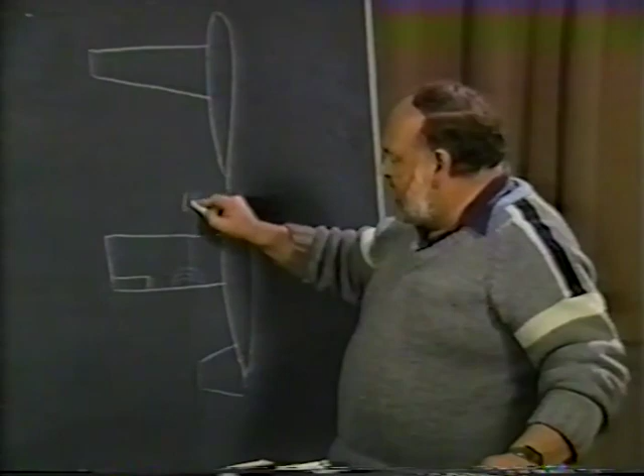This very definitely has a good effect in forcing the inboard section to stall before the outboard section. There are two disadvantages to that approach. One: if this inboard section stalls at, say, 16 degrees, just picking that as a number, and you've put 3 degrees of twist on it, then the outboard section, if everything else were the same, is only at 13 degrees. Well, if we take a look at the CL versus alpha plot again—this is the lift coefficient, this is the angle of attack...

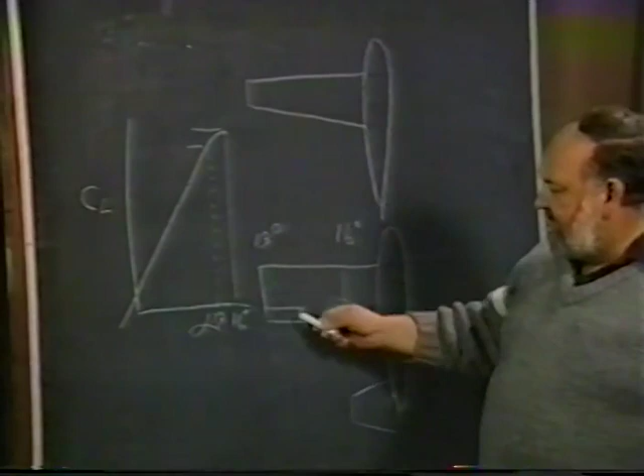If this was 16 degrees, that would cause it to stall, and if this is 13 degrees right here, you can see there is a reasonable portion of maximum CL that this outboard section isn't going to be able to generate. So for that amount of area and that airfoil section, you're not getting all the lift that you possibly can. It may not be too far away from maximum, but it still is a factor, and it depends on how much twist you put on.

The second disadvantage, of course, is that once you're cruising along at high speeds, particularly for a high-speed airplane, the outboard section now may not be lifting. In fact, it could even be lifting downward. About 10, 15 years ago, there was a sailplane, a high-performance sailplane, where the designers built a little bit of washout into the wing.

Here you are with a long aspect ratio wing, and they put this washout in it—why, I'm not sure. I guess they really wanted a nice stall characteristic for a sailplane, but that's not really important, because you don't bring a sailplane in landing at maximum CL. But in any event, after a competition one time, he came racing across the finish line, trying to get there as fast as he can.

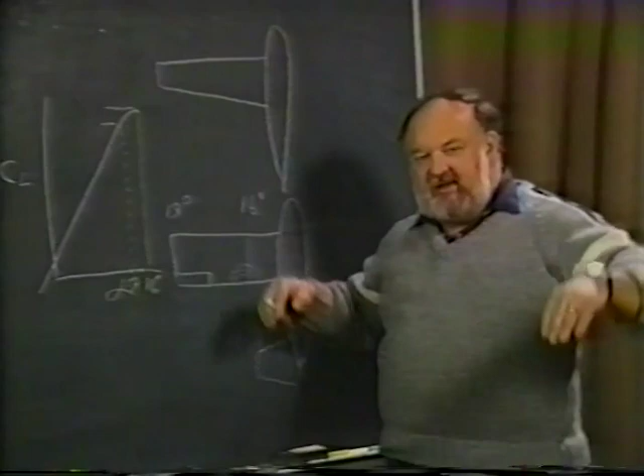As he dove through the finish line and pulled up, the outboard sections of the wings literally structurally failed downward, because the outboard section of the wing was flying at such a negative angle of attack at that high speed that it overloaded the wing spar in a downward direction.

The fellow pulled up and bailed out of it. The airplane was lost completely, but he survived without any problem. That just shows you what happens if you take a design characteristic and use it in the wrong particular place. So I'm not really very much in favor of the idea of putting washout into the wing itself like that. It can be used, but there are other things that can be done.

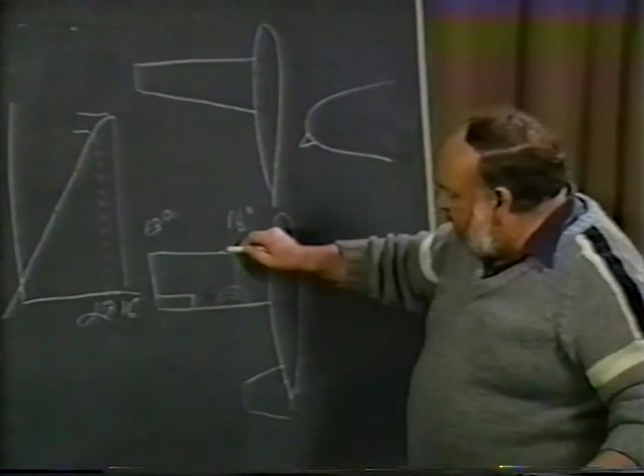For example, if you do something to the leading edge, you can immediately affect the stall. A simple way is to put a little stall strip, and I'll show you what that means. Let's take the leading edge of an airfoil. You can actually install a wedge-shaped device that might run 12 inches or 8 inches along the leading edge of the wing. All this is really doing is forcing the leading edge to stall, or at least build up turbulence to the point where it forces that section of the wing to stall.

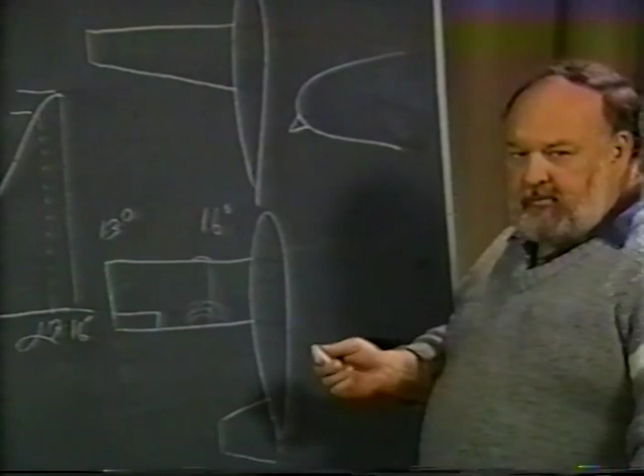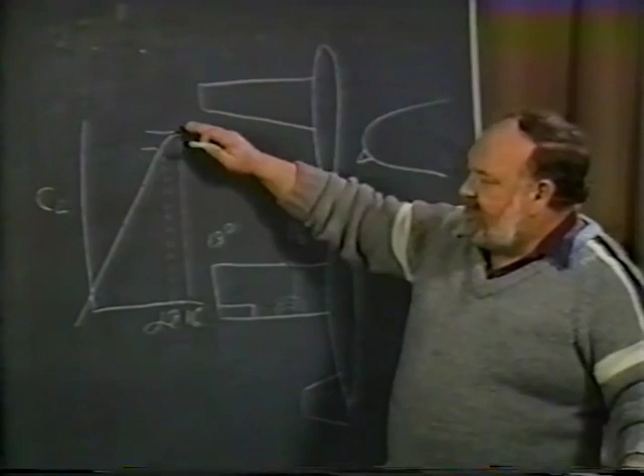But there again, what you've done is reduced the maximum lift capabilities of that airfoil section within that region. So definitely, if this part could have gotten to 1.6 to begin with, it definitely cannot get that high once you put the stall strip on it.

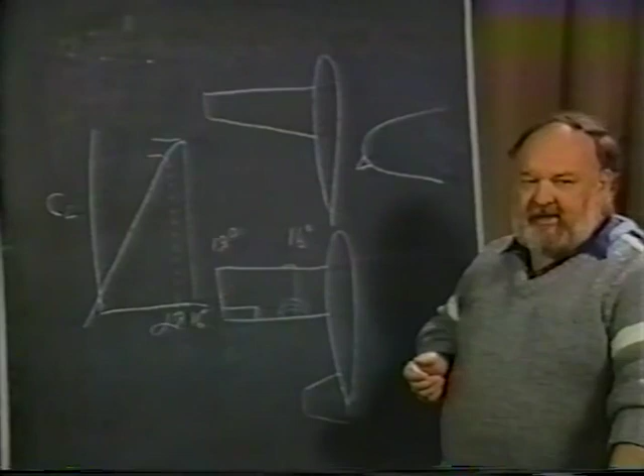So this is a method that can be used, but I really think it's a Band-Aid. You're trying to fix something that has been done wrong in the beginning. Once you have your airplane done and you're flying and you're in flight test and you see you have a problem, it's too difficult to go back now and redesign the entire wing. That's a nice solution to it. But if you're in the early stages, when you're designing it right from the beginning, let's try and avoid using something along those lines. But what else can you do?

One thing can be done, and this is where Steve Wittman was very brilliant on his design of his Tailwind. Take a look at a Tailwind and look at the plan form. What do you see? You see a little notch here in the wing. You have the straight leading edge, and then you see a sweep back of the leading edge right as it meets the fuselage. He's done it for several reasons, very cleverly.

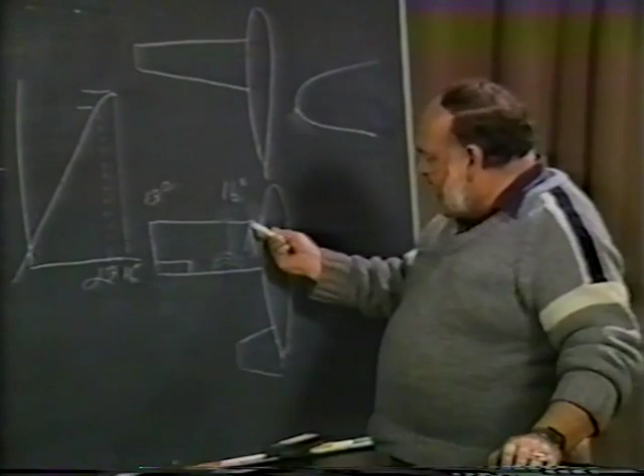His windshield now is at a much lower slope angle, less drag on that, good visibility with it. But one of the key features is that this sharp edge causes a flow vortex to build up as the air comes around the leading edge, and with the sweep back, it rolls around, and this region is the region that will tend to stall. So he ends up with a real nice stall pattern, forcing it right inboard.

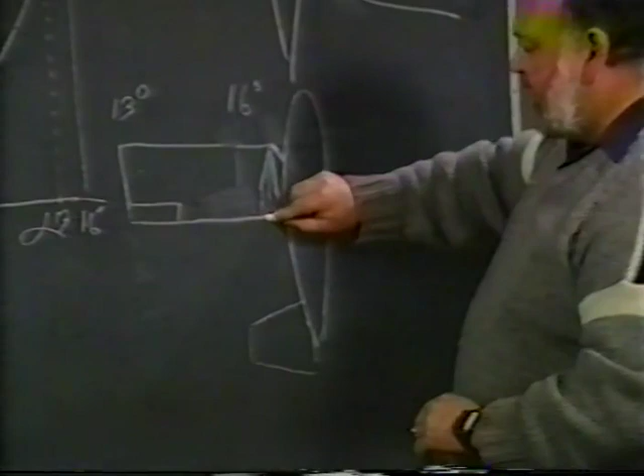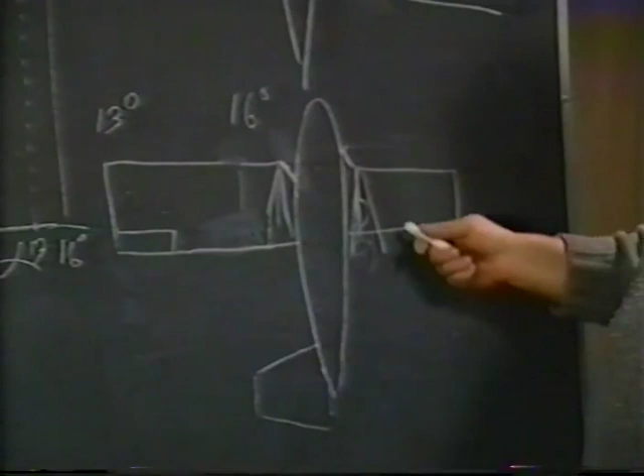Now, another way of doing the thing in reverse, and you'll see this on several airplanes, where they go the opposite way. They put a swept forward portion on the wing, or the wing fillet itself. This leading edge sweeping forward does the same thing. It causes the air to roll over, come over the top, and roll in here, make a vortex, and as this swirling air rolls over the wing, it actually will trigger a stall to begin in that region.

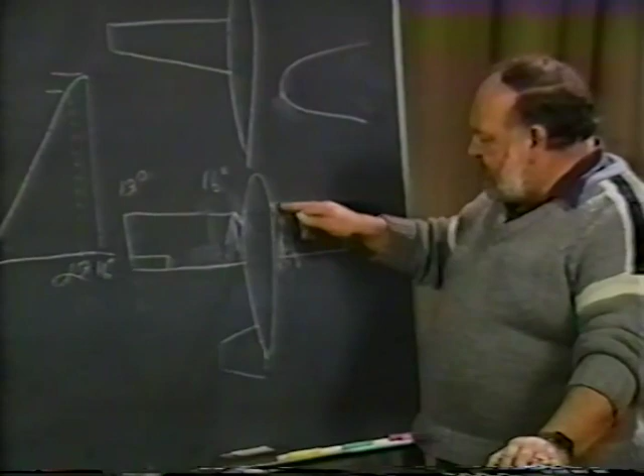It's a little bit like what you have with the stall strip, except that once you level out, once you get cruising, this swept leading edge, whether it's swept forward or backwards, has no adverse effect, whereas if you put a sharp leading edge on your airfoil section itself, that's hurting you at cruise just as well as it helps you a little bit near your stall. So this method works very nicely, has a very decided advantage all the way around.

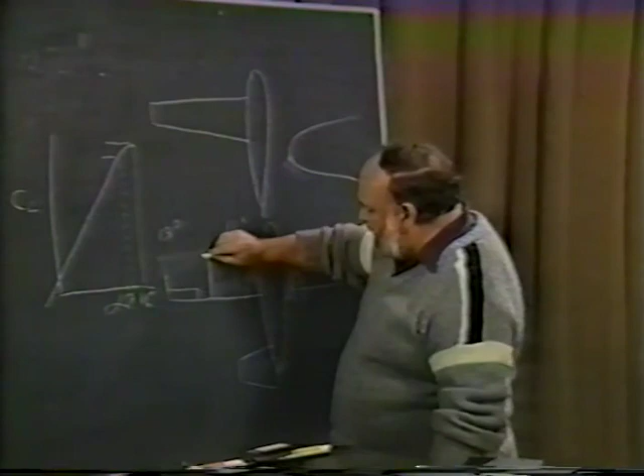You've seen some airplanes too where they'll go to a trapezoidal section, and by that I mean it's constant chord out to a point, and then they sweep it back on the leading edge. If this is done exactly right, you can develop a good stall pattern, but in many cases it isn't.

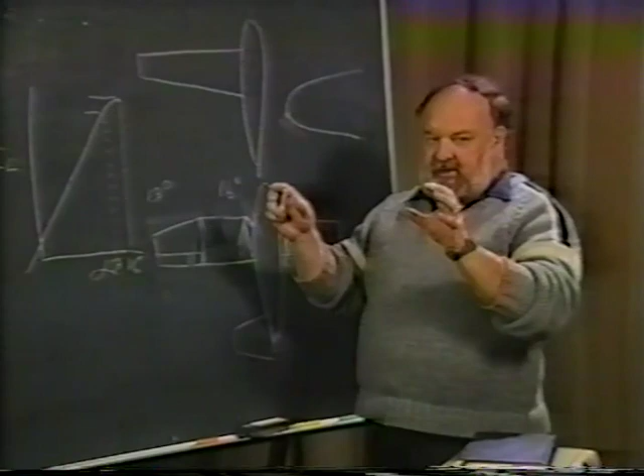It looks like a nice fancy little layout with good aesthetics, but if this break is too far outboard, all the way out to where the ailerons begin, then you're going to cause flow separation starting quite far outboard. That's always dangerous because it's not easy to make an airplane fly through smooth air, pull it up and stall it without any yaw whatsoever. Having both wings stall exactly at the same time isn't easy to achieve, and with just a little yaw, one section will stall first, causing the airplane to roll. So something inboard is a better approach, staying away from anything outboard.

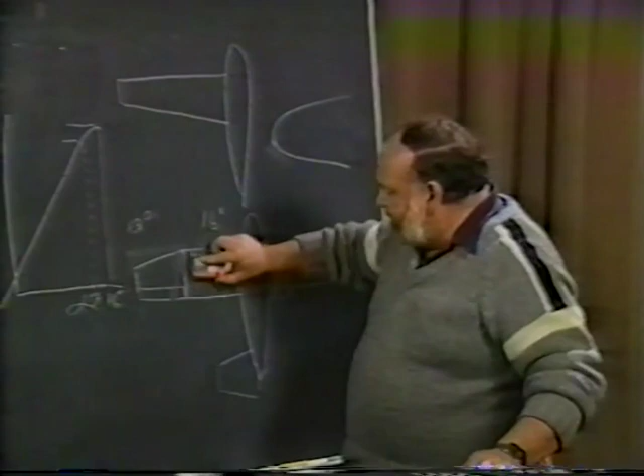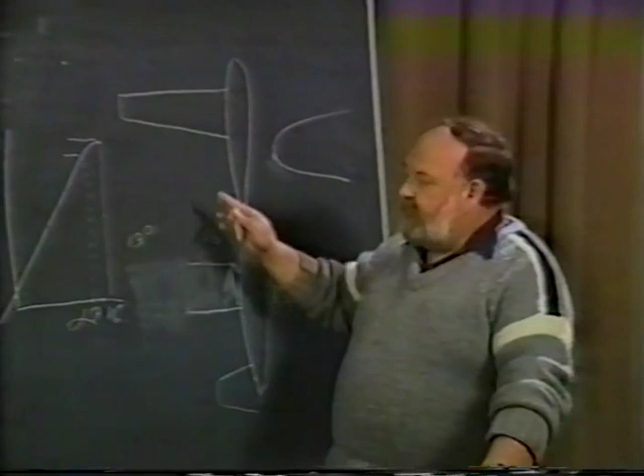Now, when we came to an airplane like the BD-5, we used a different approach. We used a tapered wing with a smaller chord at the tip. We were well aware this tip now had a lower Reynolds number, and that this airplane was going to go quite fast, so we did not want to put any twist into the wing. But we still wanted a good stall pattern. So what technique did we use there?

One of the things we did was change the airfoil section thickness. We used a 12% thick airfoil at the root—not very thick, but this was a high-speed airplane and we didn't need anything thicker. We went the opposite way of the conventional approach: instead of a thin airfoil at the tip, we went to a 16% thick airfoil at the tip.

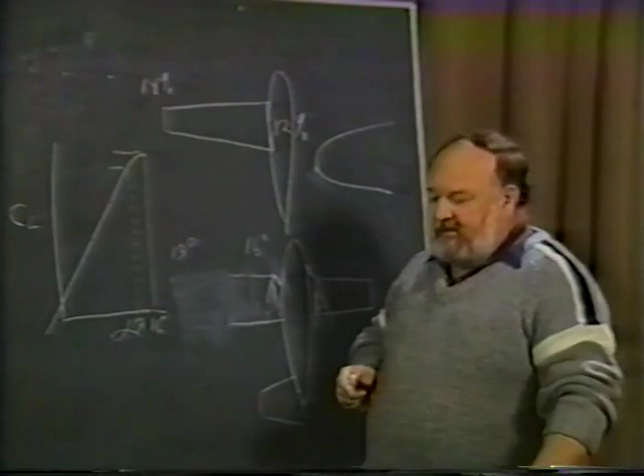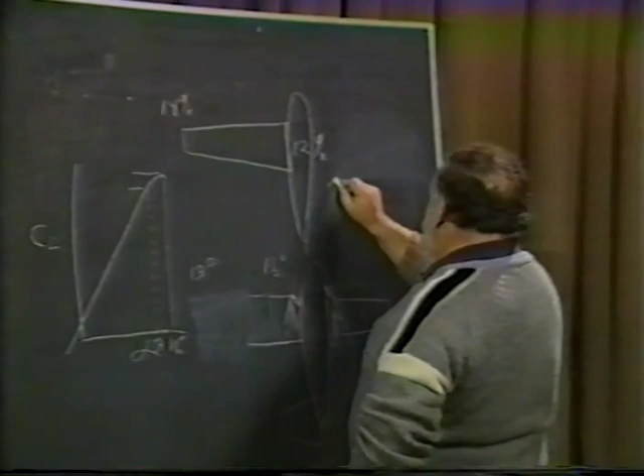But because the chord was less—the wing tapered and the chord was smaller—from a head-on, chord-line view, if you draw the inboard airfoil section, it looked like this: the thickness in actual inches came out to about 4.5 inches, which at that point equaled 12%. We drew the tip airfoil with its smaller chord, and it also had a maximum thickness of 4.5 inches. But this 4.5 inches equaled 18% of this shorter chord.

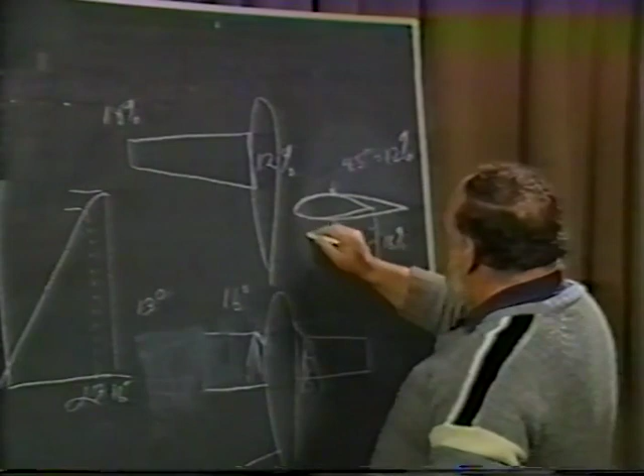What does this mean? It meant we ended up with an airfoil section outboard that had a leading edge radius the same in actual physical inches as the root, but percentage-wise much bigger for the tip airfoil section. A thick airfoil section with a larger leading edge radius gives you a much higher angle of attack before stall, and sometimes a much higher CL. So the inboard airfoil had a lift curve slope like this, but the outboard one went up like this, stalling about 3 degrees higher—let's say 16 degrees—than the inboard one.

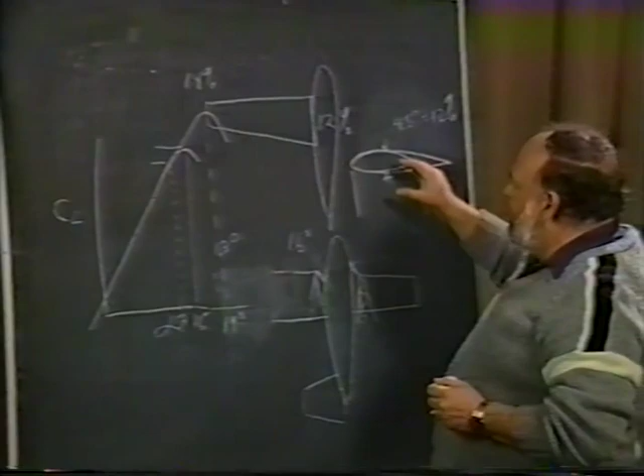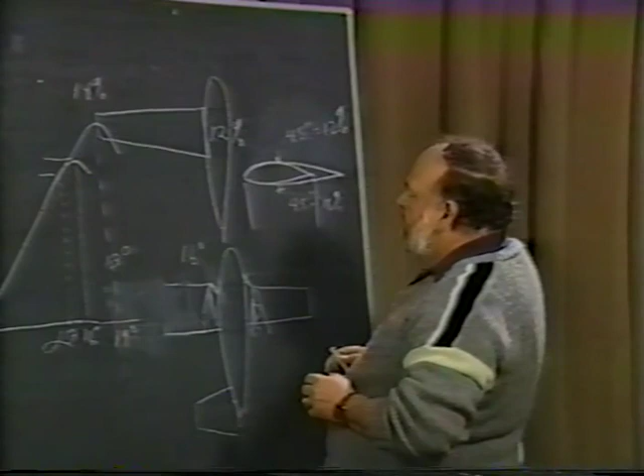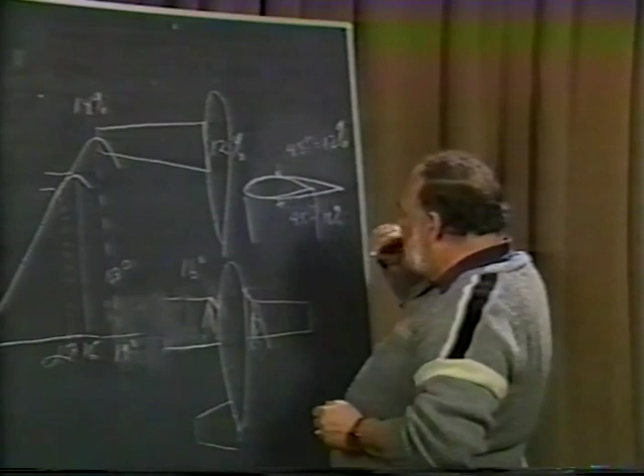So here was a wing design that was tapered, giving certain advantages of being closer to an elliptical lift distribution for the whole wing. Yet it was easy to construct because we had almost the same leading edge radius—straight and smooth throughout, with equivalent thickness of about 4.5 inches all the way. So whether using a tubular spar or an I-beam spar, you can have a straight spar without tapering it. That has its advantages, and being a relatively thicker percentage airfoil with a larger leading edge radius, we ended up with a really nice lift coefficient.

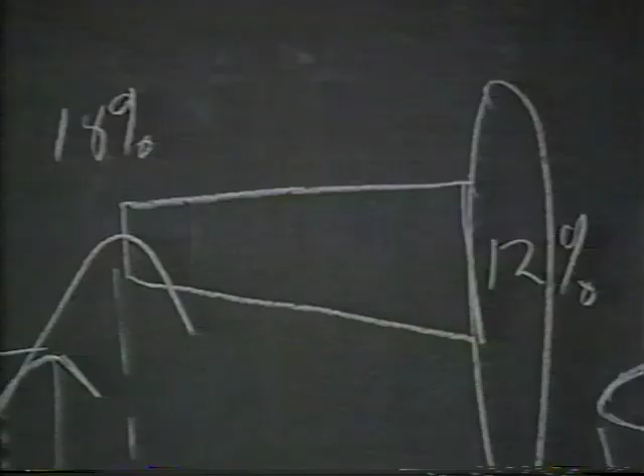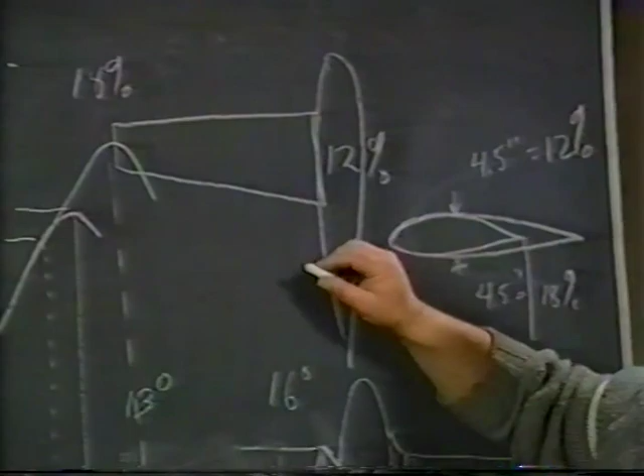Our lift coefficient went higher at the tip, stalling 3 degrees later than the inboard section would stall. What does this mean? It means that with this tapered wing and excellent stall pattern—where the outboard section stalls 3 degrees later than the inboard section—the pilot can pull the airplane up into a stall, have it sit there, and buffet.

The inboard section is going to start separating first. You'll feel it on the tail, so you have beautiful stall warning characteristics. But more important is the fact that with ailerons in the outboard section, if the pilot deflects the aileron downward to lift that wing, he's operating in this region. As the aileron goes down, like a plain flap, the outboard section will not stall just because the aileron went down. This is one of the dangers you have to worry about if you don't have a good stall pattern and if your outboard section is relatively sensitive.

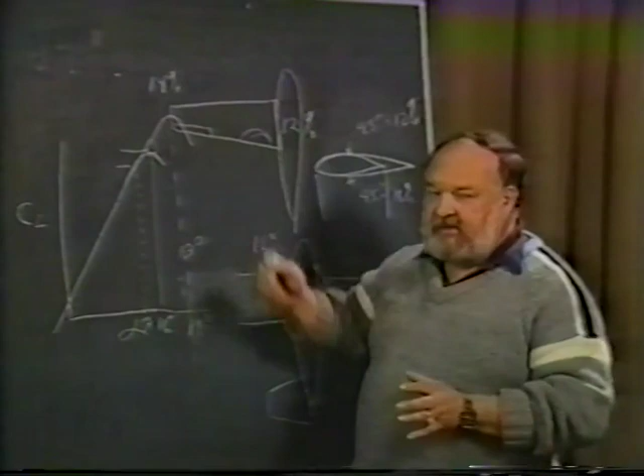A J3 Cub was a good example. Here you are with the straight wing, straight sections, the old USA 35B airfoil on it, and it'd be real fine, except if you were near a stall, you still hadn't stalled yet, the airplane's flying, and then you go ahead and move the stick to the left, and the right aileron comes down. As it comes down, it tries to produce more lift out of that wing than it's capable of, and that section stalls. Now what happened? You wanted to bank to the left, so you gave left stick, but the right wing stalls and the airplane goes the opposite direction. Immediately it confuses the pilot, and off you go, possibly into a spin.

In the case of this design, we could actually sit there buffeting, getting this inboard section to separate, and as we're doing that, be able to move the ailerons right and left, no problem. I'll get beautiful roll control out of it. So this meant that as you were turning from base to final, if you accidentally let the airplane get too close to stall and start getting a little buffeting, and realized you had a problem and forgot good judgment and went ahead and moved the ailerons as opposed to getting out of the near-stall condition, you didn't do a major mistake. The airplane itself could recover it.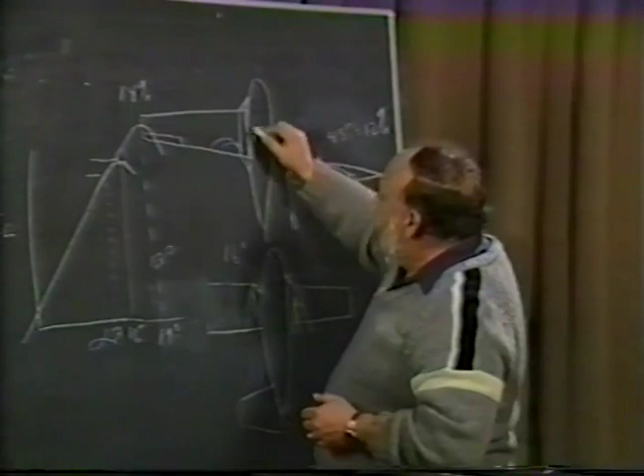Now one of the other things we did on the BD-5, some of you might remember, is that we actually used a fillet in here that had a swept-forward leading edge. So we helped trigger off the stall by the swept leading edge, by the thicker airfoil out at the tip, and the end result is you can have an extremely good flying airplane.

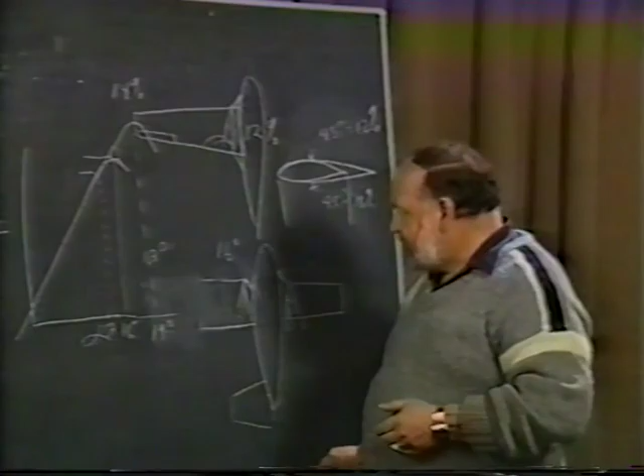One side effect of all of this is how does the airplane act in a spin? First we're talking about stall patterns, but then what happens once you really get into a spin? Well, most of the time the same things that give you good stall characteristics and good stall patterns will also give you good spinning characteristics. Good spin characteristics are very important for any airplane, whether you've designed it to be an aerobatic airplane that you want to demonstrate can actually spin, or if it's just a straight general aviation or home-built aircraft for normal flying. It's very advisable and wise to have one with a nice spin characteristic, so that if you purposely or accidentally get into the spin, it will also recover quite well.

There are several things that you can do to influence this.

NASA has been doing a fair amount of work recently in wing layouts. Let's look in this case at a more rectangular type of planform. They found that if this outer half, at least the outer one-third, is handled significantly in preventing that portion from stalling, whatever the method you want to use—one of the things they did was put a cuff on here with a very large leading edge, actually drooped. What that was doing is preventing the stall from occurring in the outboard section until quite a bit after it would occur in the inboard section. When they did this, they found the airplane was almost unspinnable. It could have excellent characteristics. In some cases you just could never spin it, or if it did spin, it was very easy to recover from right away.

One of the reasons was that this portion of the wing itself was not stalling, was not separated, or was considerably less separated once it got into a full spin as compared to the inboard section.

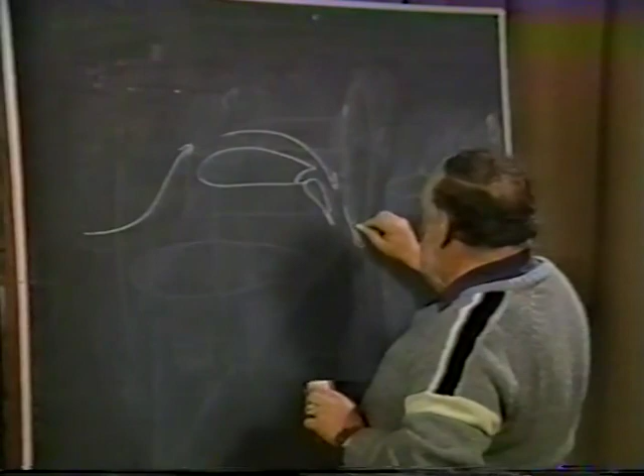...that your stagnation point, the point where the air comes along and hits the wing, on one side of this point the air goes around the leading edge, and in the other case it goes under the wing. Where this stagnation point is, is something you have to be aware of.

I'm sure you all remember the simple little stall warning device, which was just a little tab connected to a micro switch that would stick out there. And as the airplane's nose came up and the stagnation point moved behind and underneath that little tab, it pushed the tab up, which activated the switch, which gave the pilot a warning that he was getting near stall. And it worked quite effectively.

Well, on the L-19, what happened is you have a strut coming down at a certain portion out in the wing, and they produced so much lift with the boundary layer control that the stagnation point actually came and touched the wing at where the strut meets the bottom of the wing.

Someday if you get a chance to look at an L-19 or even a Cessna 172, look at where the strut comes in underneath there. It's amazing how far back that stagnation point would come, touch the wing, and then the air would rush forward underneath the wing all the way around the leading edge and up over the top.

But as soon as it got to the strut area, in that one region where the strut met the wing, it actually would separate and cause turbulence, causing the wing to start stalling in that section of the planform where the strut would meet the bottom of the wing.

So when you're working on this type of stuff and doing design, be careful what you have down underneath there. Don't have a situation where you've got skin and a big gap underneath, or some really heavy rivets or something like that. Even though it looks like it's under the wing and reasonably far back, it still might be a factor at high angles of attack, actually kicking off your stall pattern.